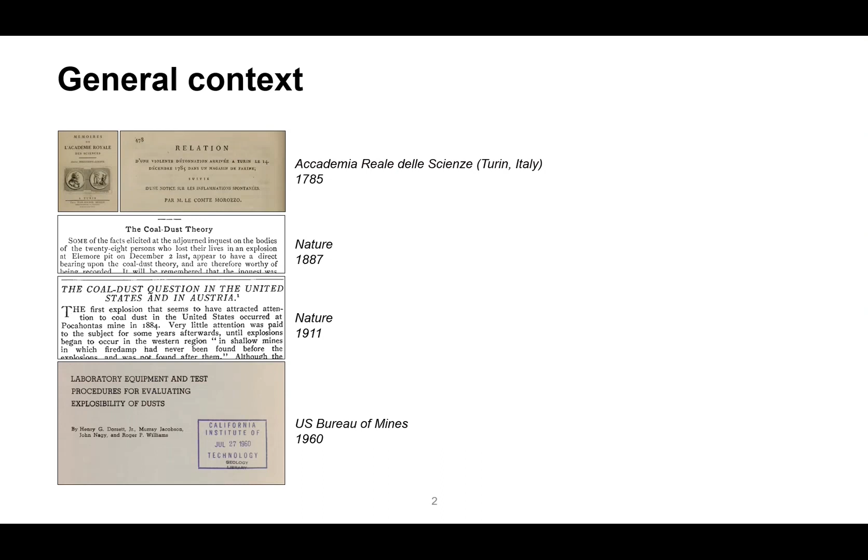Then, with the second industrial revolution and the increasingly important use of coal as an energy source, coal dust explosions in mines caught the attention of the scientific community. In the second half of the 20th century, dust explosions were reproduced on a lab scale to be studied and classified. Nowadays, we associate dust explosions with fast combustion processes involving finely dispersed, finely subdivided material.

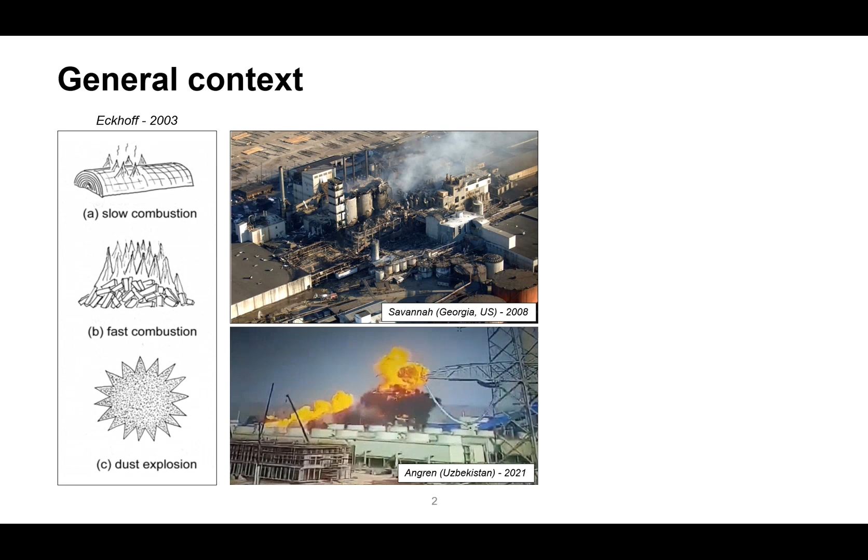We can count on detailed and deep experience feedback, represented also by incident reports. For example, in the Combustible Dust Incident Report, 2020 edition, we find important information to understand these phenomena, such as the type of powder involved in dust explosion incidents. Here you can notice how food products and wood products represent the majority of dust explosion incidents.

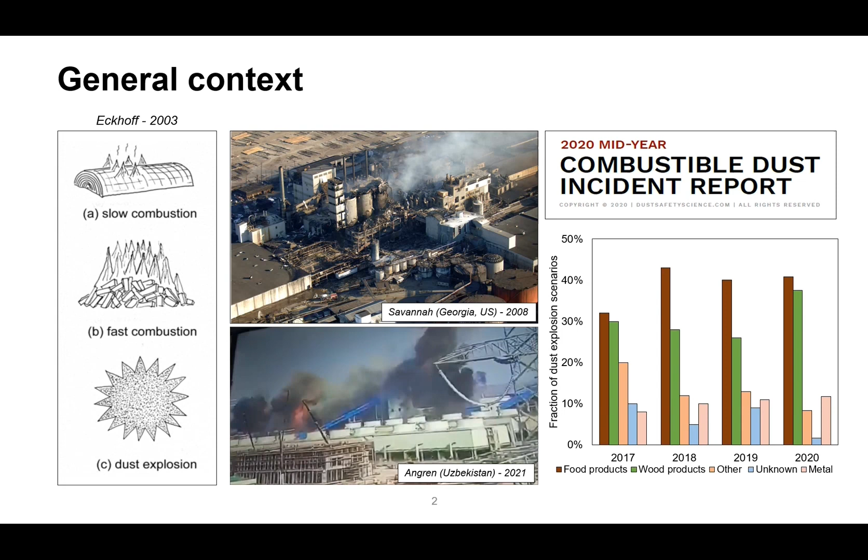So let's start by considering dust deposits - a powder in a quiescent and static state that we disperse in the form of a dust cloud. We can call this process the dispersion step.

Eventually, the dust cloud on its path can encounter an ignition source that can locally increase the temperature of the particles. So we are talking about the particle heating step.

If the increase of temperature is high enough, the pyrolysis reaction may be triggered and pyrolysis products can be generated in the gaseous atmosphere around the particles. Eventually, in the presence of an oxidizer, a flammable atmosphere can be created and oxidation reactions can be triggered.

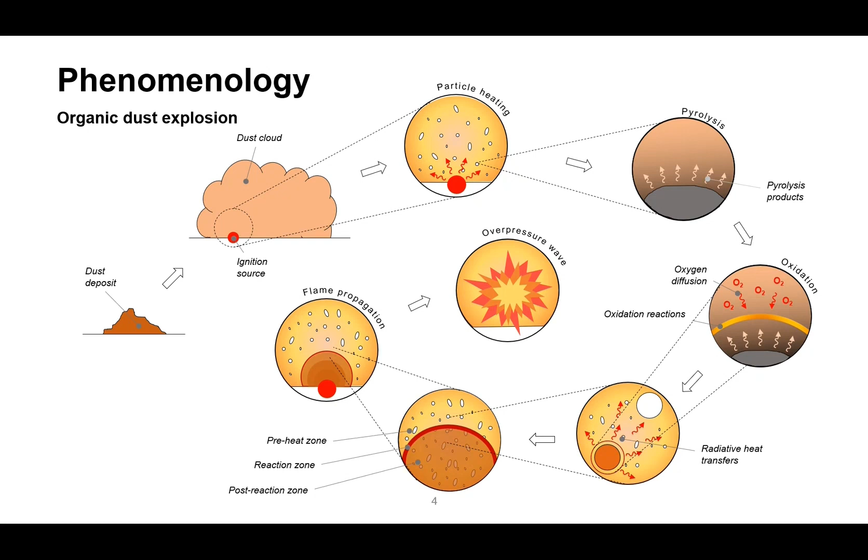This complexity can be resumed in six fundamental steps: the dispersion step, the particle heating step, then pyrolysis and oxidation steps that lead to flame propagation within the dust cloud, and finally the overpressure wave. This is also the global approach of this thesis.

So we took the global phenomenon of an organic dust explosion, we split it into 6 different steps, and we wanted to create and propose experimental tools, eventually supported by modeling, to analyze and characterize qualitatively and quantitatively each step.

The first section of the results will be focused on the dispersion step. The second will focus on particle heating and pyrolysis steps in a dust cloud. The third will analyze the pyrolysis and oxidation reactions and their role in an explosion, considering also the overpressure wave results. Finally, I will present results concerning flame propagation, including some overpressure wave results.

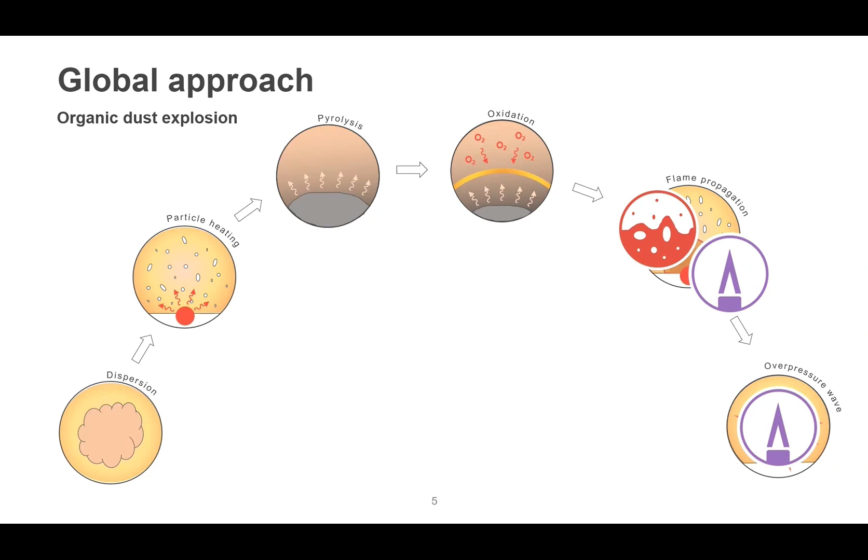So let's start with the outline. I presented the 4 sections, and general conclusions and perspectives for the future will also be presented. Then let's start with the first section, focused on the dispersion step.

First of all, we wanted to develop an experimental strategy for this section. We asked ourselves what we need for, and we found 5 main answers.

First, we needed to control the dispersion conditions in order to study them and their influence on the final results. Then we wanted to use a lab scale setup to develop a non-intrusive approach to study some in situ characteristics of the dust cloud. And then we added also the possibility to set the temperature of the setup.

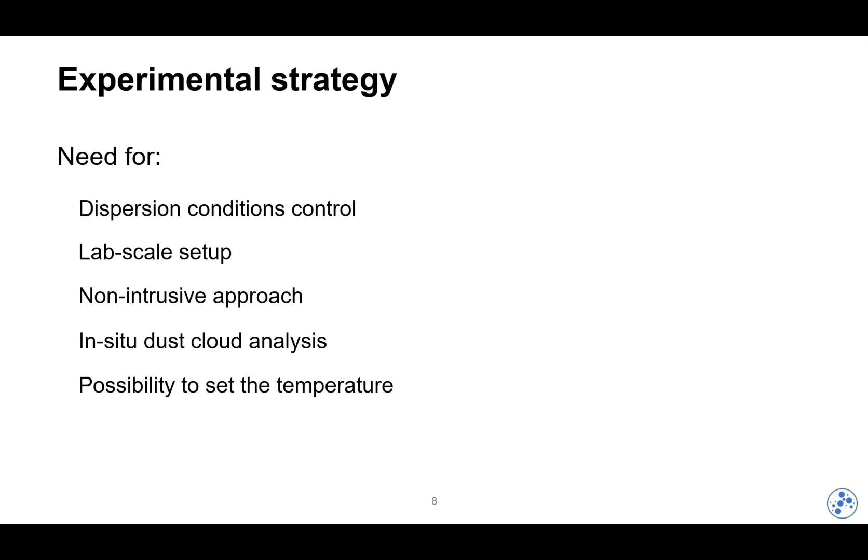The choice fell on the Godbert-Greenwald furnace. It's a standardized apparatus usually used for the determination of the minimum ignition temperature of a dust, and we adapted it to our needs.

The main characteristic that we wanted to study was the dust cloud PSD, so the particle size distribution. We took the Godbert-Greenwald furnace and developed an experimental method to study the time and space evolution of the dust cloud PSD in this apparatus.

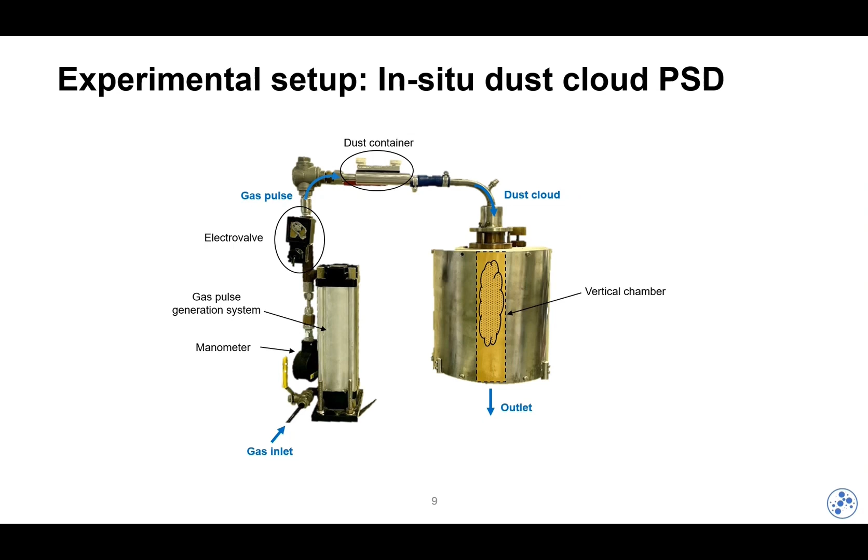It is normally formed by 3 main parts: a gas pulse generation system to the left, the horizontal part at the top is the dust cloud generation system, so the powder is dispersed and passed through the final part, the vertical chamber.

In order to study the space evolution, we selected position 1 to perform the analysis of the PSD, just after dispersion. Position 2, just after the main obstacle on the path of the dust cloud. And position 3, the exit of the vertical chamber.

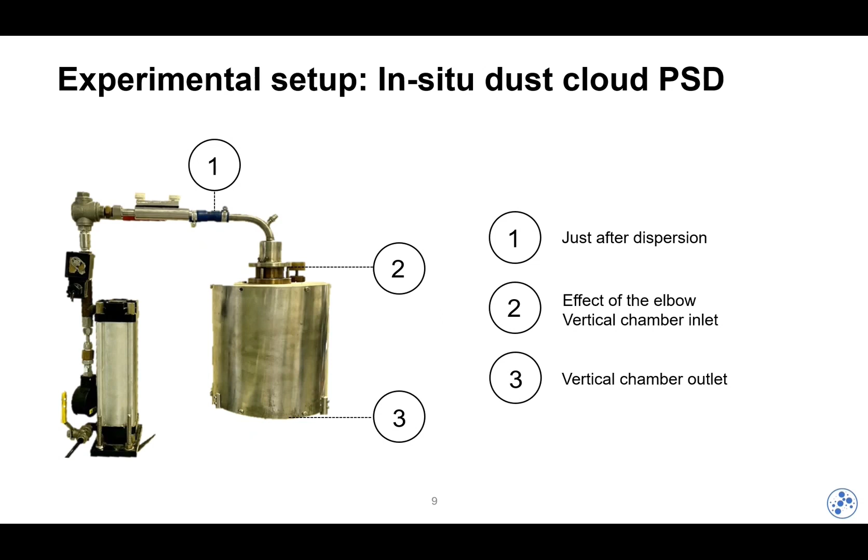Concerning the PSD measurement, we took the Godbert-Greenwald furnace, placed it between the 2 elements of a laser diffraction sensor, and were able to collect PSD curves every 10 milliseconds. So it was a high frequency acquisition analysis, and we used this analytical tool to characterize the dust cloud PSD over time and for the 3 positions.

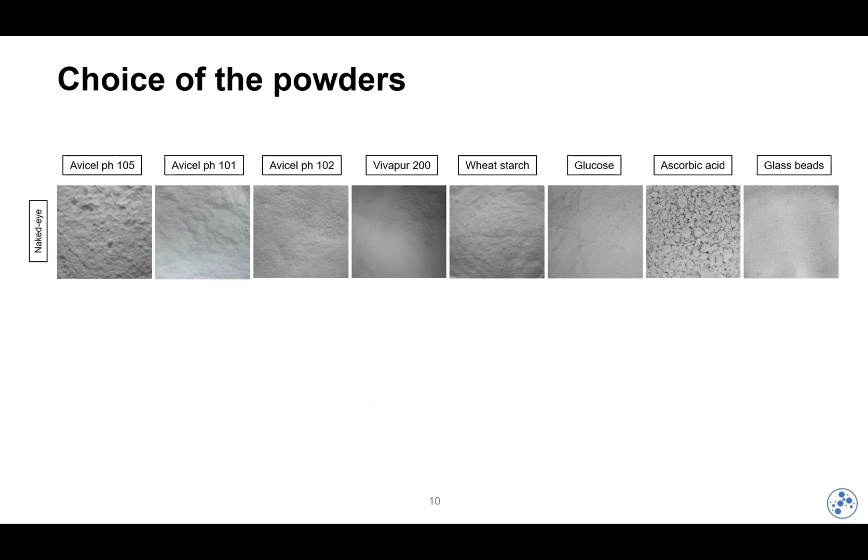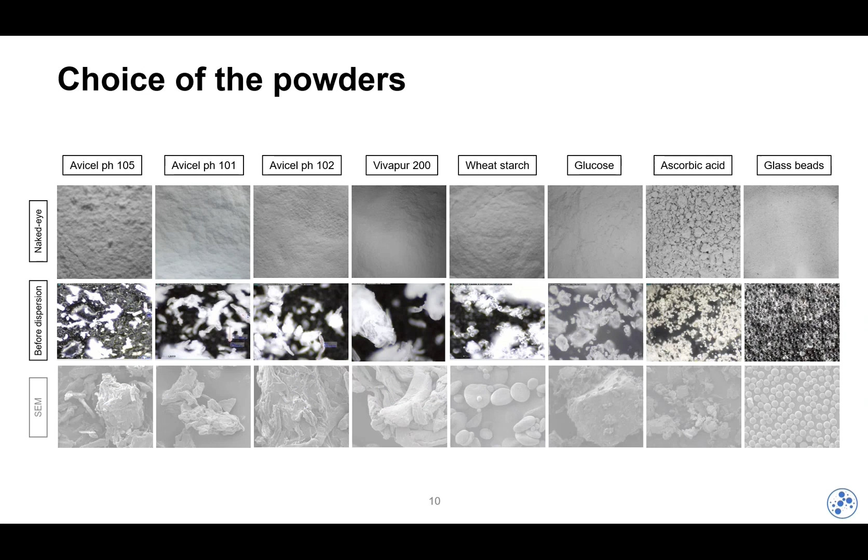Concerning the choice of the powder, the organic dust that we selected, we chose 7 powders plus a reference powder. We characterized them in terms of naked eye appearance, optical microscope imaging to characterize the particle shape, and with the scanning electron microscope, we characterized both the shape of the particles and the morphology of the surface.

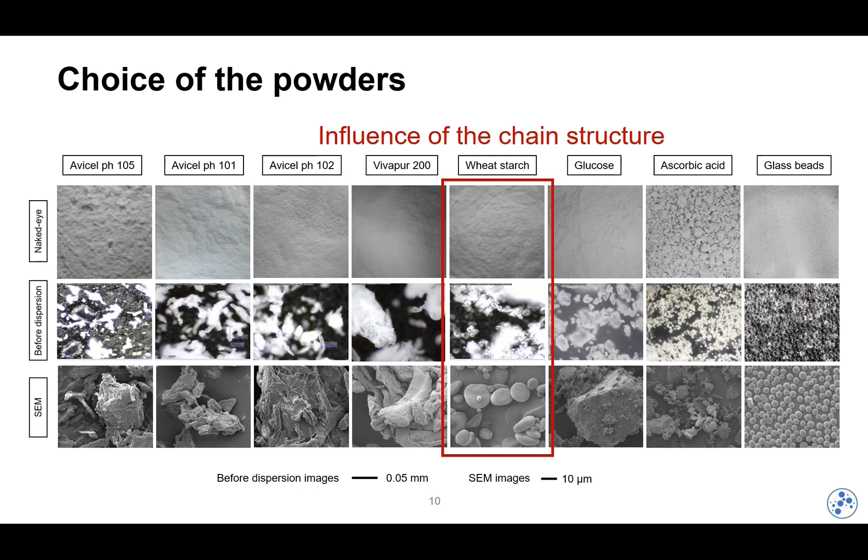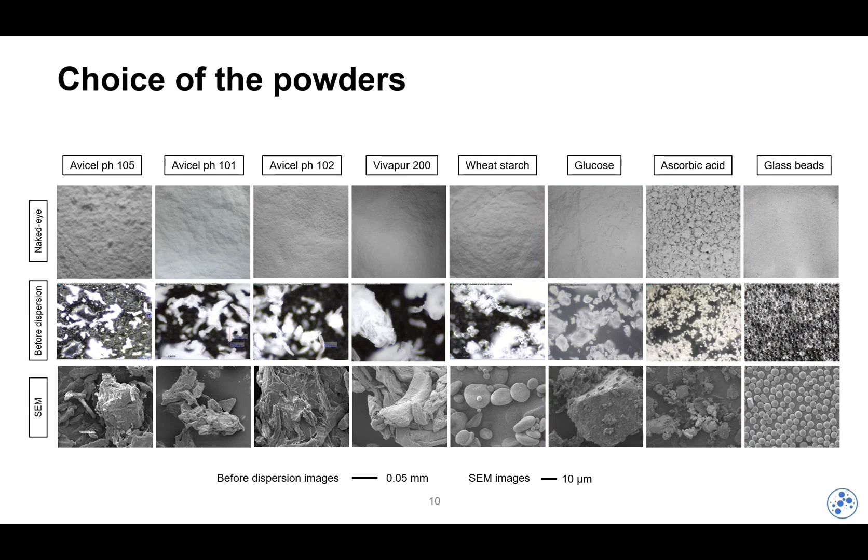We chose 4 different celluloses to study the influence of the initial PSD on the dispersion step. Then starch, to study a molecule that has the same main monomer as cellulose but a different chain structure, so different properties of the material. We selected glucose and ascorbic acid to introduce a completely different chemical nature among the powders, and glass beads as a reference sample.

The second layer of information is represented by the agglomeration index. We wanted to quantify the agglomeration tendency of each powder. We plot the D90, a characteristic diameter, as a function of time.

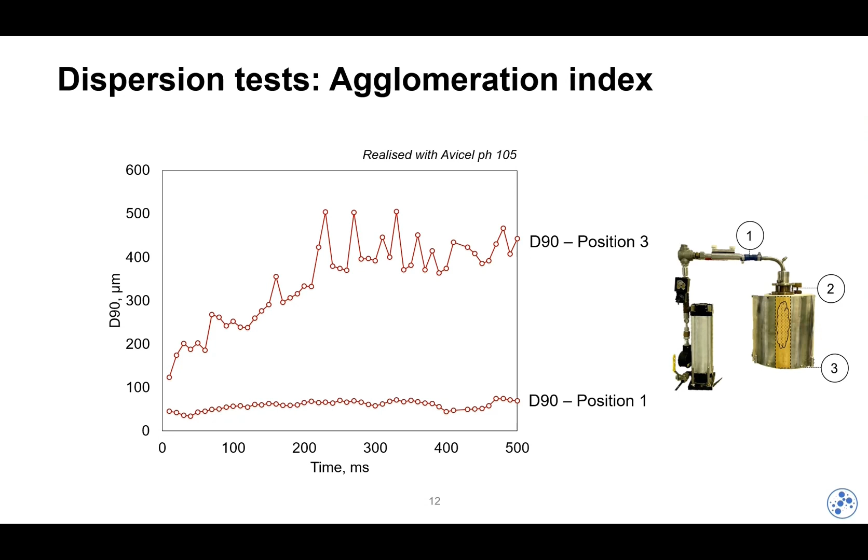As you can see, for example, if we consider position 1 and position 3, we can notice a high agglomeration tendency, which we wanted to characterize, to quantify. So we calculated the normalized difference between position 3 and position 1, and we calculated the agglomeration index, for example, associated to D90.

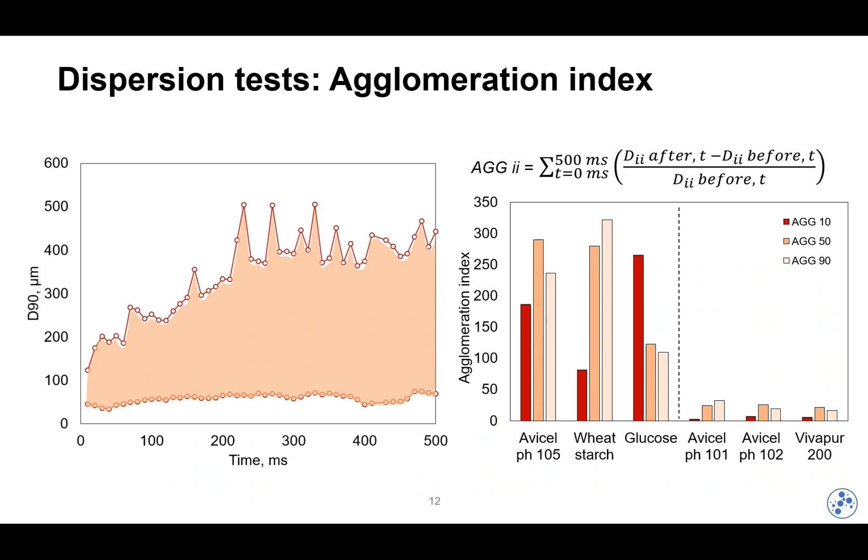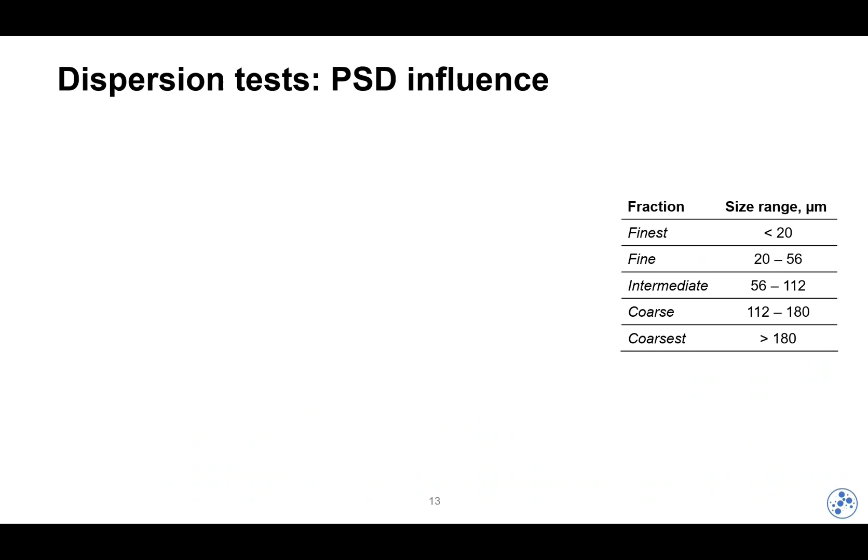We can introduce also the characteristic, the influence of the chemical nature of the 2 samples in the agglomeration tendency.

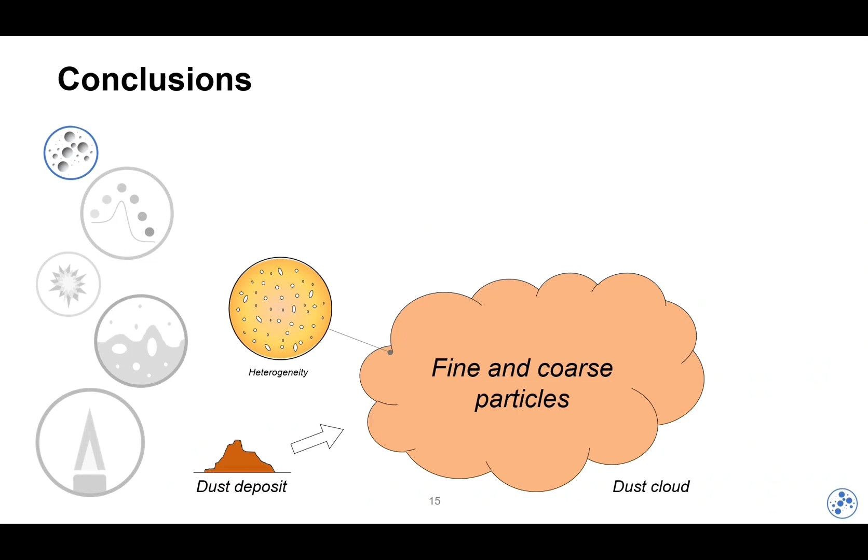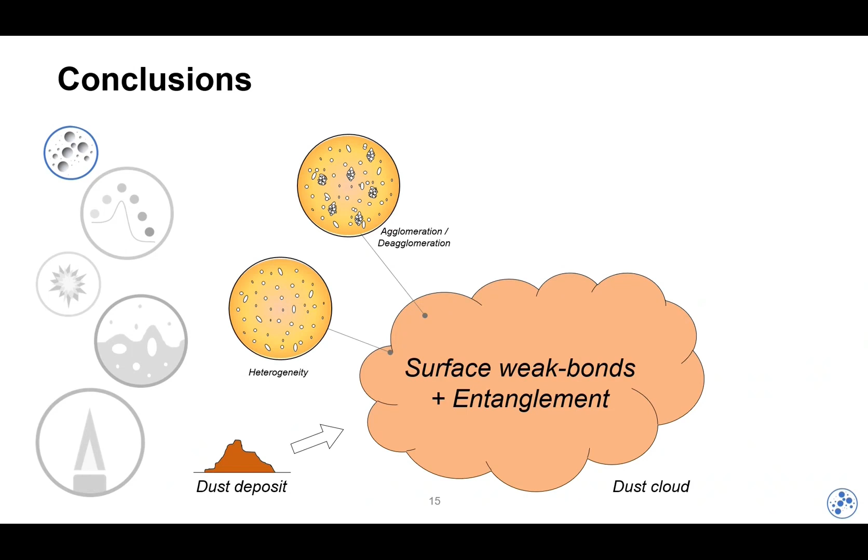In order to conclude this first part, if we consider a dispersion step, we always have to take into account the heterogeneity associated to a dust cloud. There are finer and coarser particles that lead to different agglomeration phenomena. The finest fraction is more prone to surface weak bonds interaction. The coarser particles are more prone to entanglement, so geometrically interaction between the particles.

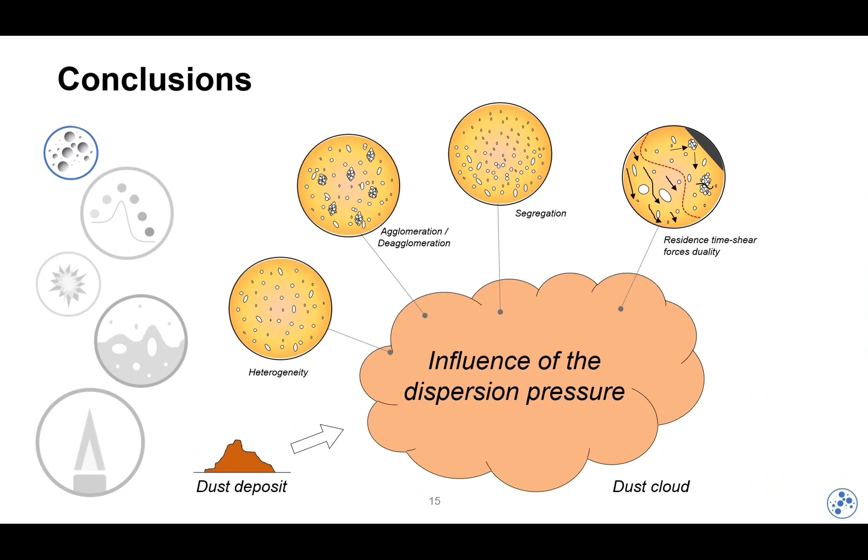A high level of segregation modifies the residence time distribution of the dust cloud. There's a duality between the residence time and the shear stresses, which is influenced by the dispersion pressure. And then a final important influence on the ignition phenomena at higher temperature.

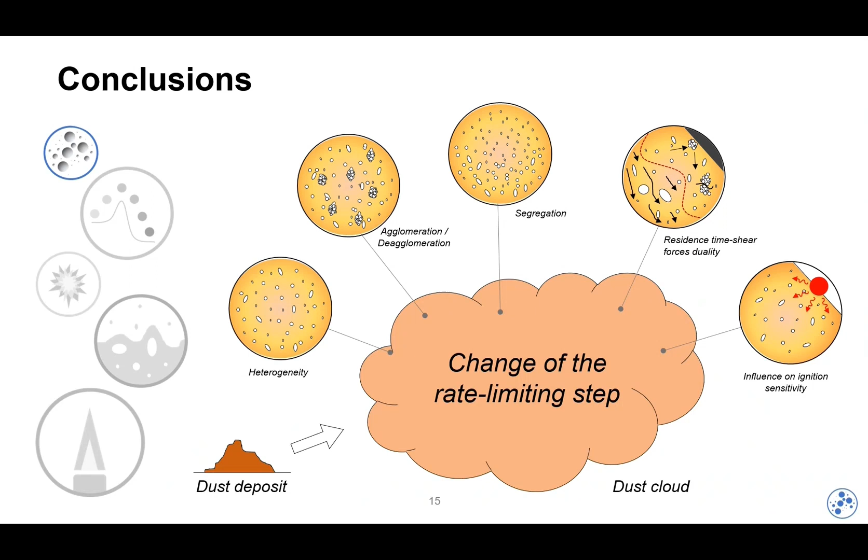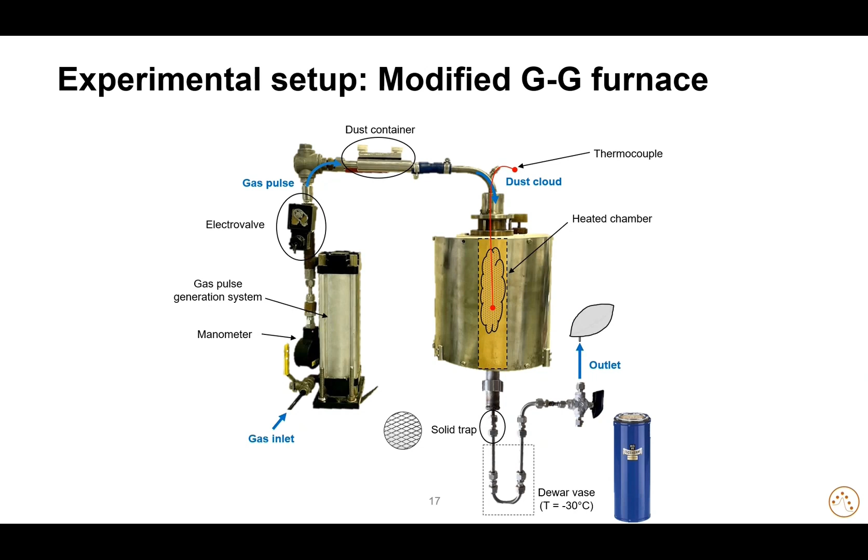This leads us to the second section, more focused on the behavior of dust cloud in terms of particle heating and pyrolysis. We consider the same experimental setup, but we slightly modified it. We added a final section in order to be able to create an inert atmosphere inside the setup, and at the same time, we wanted to be able to collect solid products, the condensable fraction, and the gaseous products coming from the flash pyrolysis in the dust cloud.

The experimental procedure consisted in dispersing 0.2 grams of cellulose here, but we performed other tests on other powders in the furnace at different temperatures, and characterization of the different fractions of pyrolysis and combustion tests with different analytical techniques.

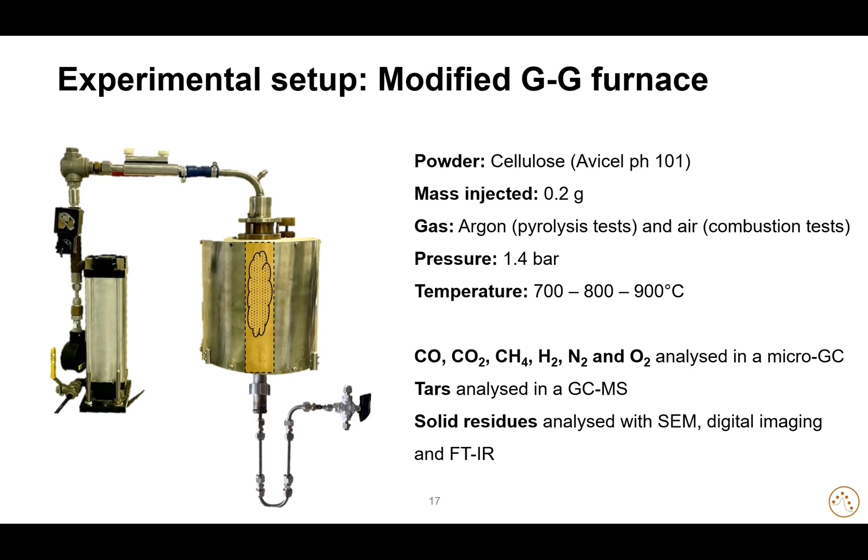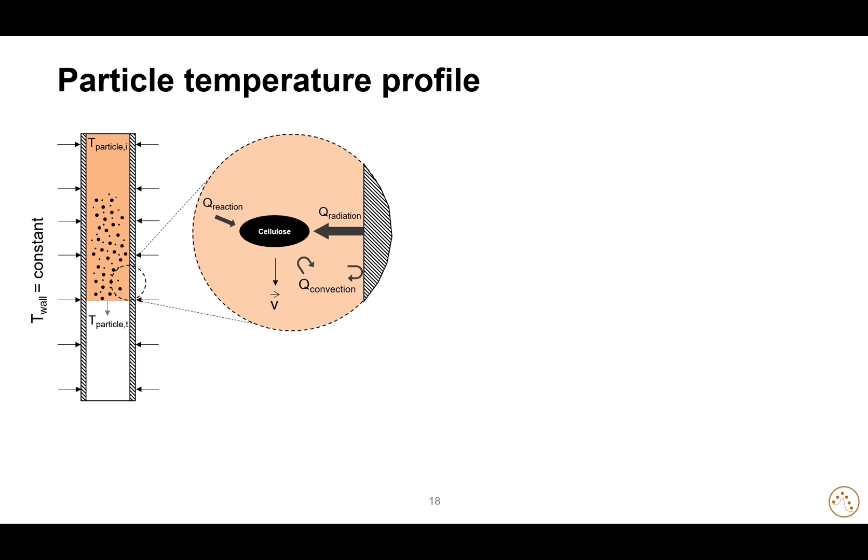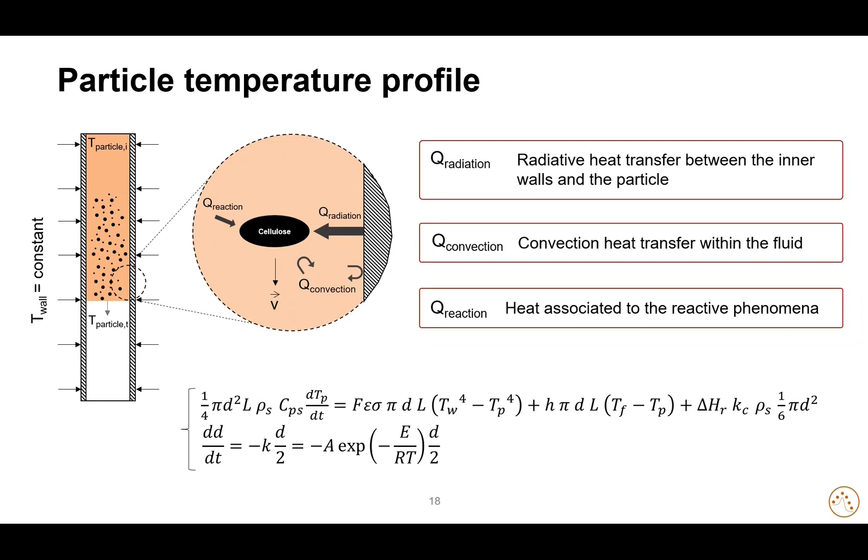In order to create the first layer of information, we wanted to add some information about the particle temperature profile. We considered the dust cloud passing through the cylindrical chamber, and we considered the three main heat transfer modes to non-spherical particle of cellulose: radiation, convection in the gaseous phase, and the heat associated to the different reactions. We elaborated the model, considering the particle temperature and the particle thickness as the two variables, and we were able to combine these results with experimental data to elaborate what we call the dust cloud thermal analysis.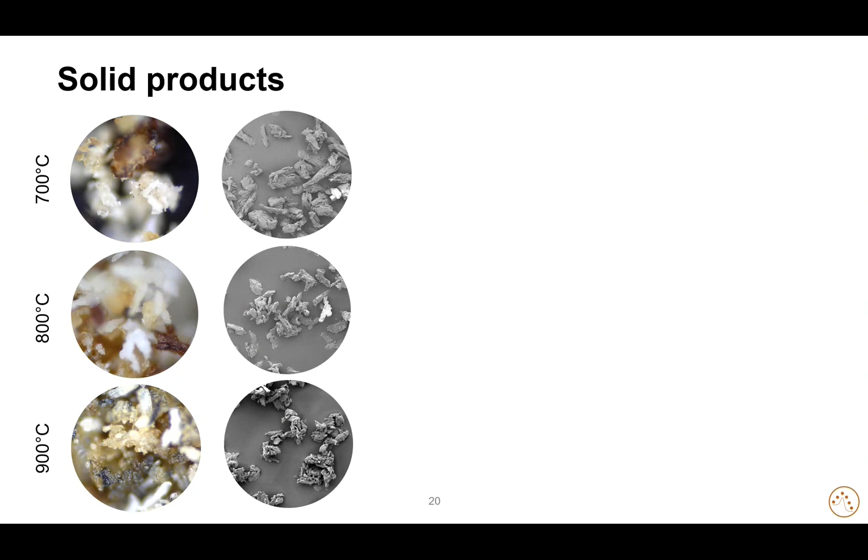This was confirmed by the analysis of the solid products. The images obtained with the optical microscope allowed us to stress out the heterogeneity of the conversion degree. Here you can see an increasingly converted residue as the temperature increases. The scanning electronic microscope allowed us to confirm these results, especially in terms of surface morphology. We can notice an increasingly important volatilization and agglomeration of the particles.

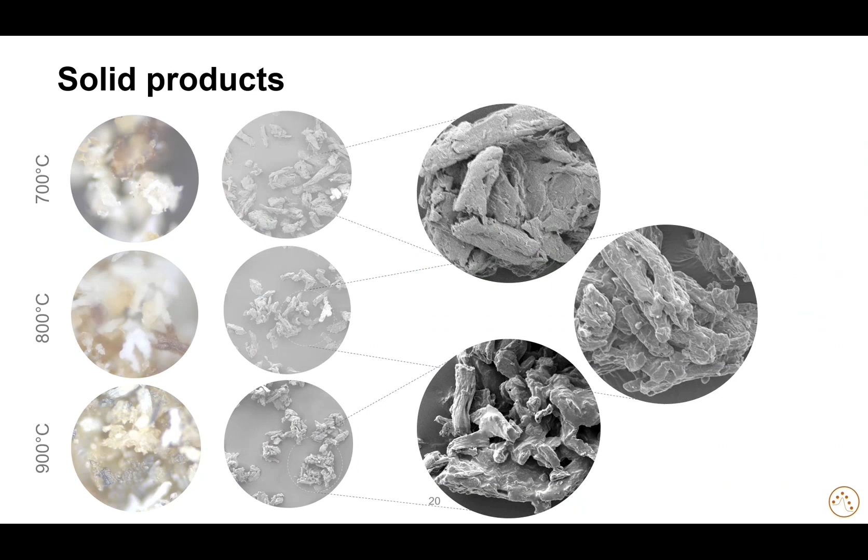And to support these results, we performed infrared absorbance analysis.

As for the condensable products, we were able to isolate one key molecule, the levoglucosan, representing the main product of the flash primary pyrolysis. It is also related to cracking reactions and oxidation reactions.

With the GC-MS, we were able to stress an increasing production of levoglucosan as the temperature of the reactor goes from 700 to 800 Celsius, and a subsequent cracking of levoglucosan as the temperature increases to 900. With the combustion tests, we were able to stress the consumption of this molecule in the oxidation reactions.

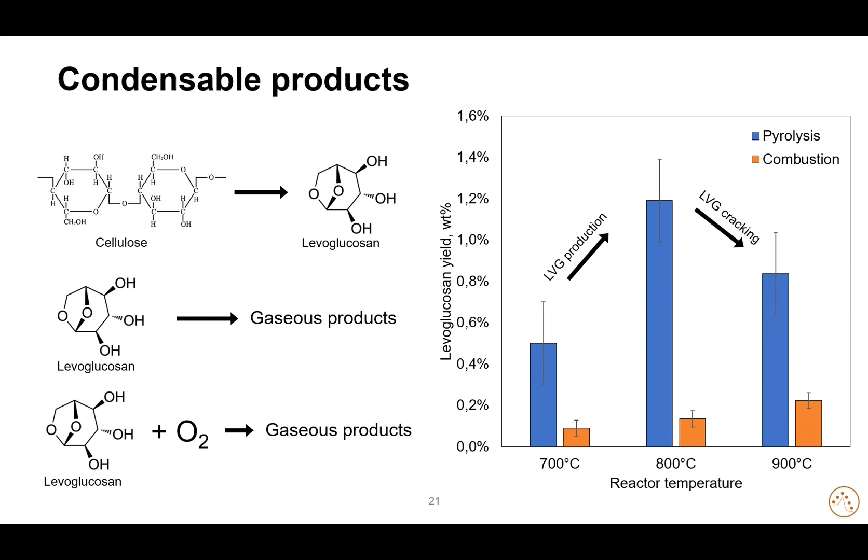Finally, as for the gaseous products, we isolated H2, hydrogen, methane, CO, and CO2 as the most abundant products. We can notice a high influence of the temperature of the reactor for the methane. If we compare these results with the combustion tests, we can notice a very slight influence of the reactor temperature for hydrogen.

Methane is importantly converted in the oxidation reactions. CO, which can be associated to a semi-complete reaction of oxidation, is way higher, way more abundant in the combustion tests. CO2 is slightly higher in the combustion test, but still comparable to the pyrolysis ones.

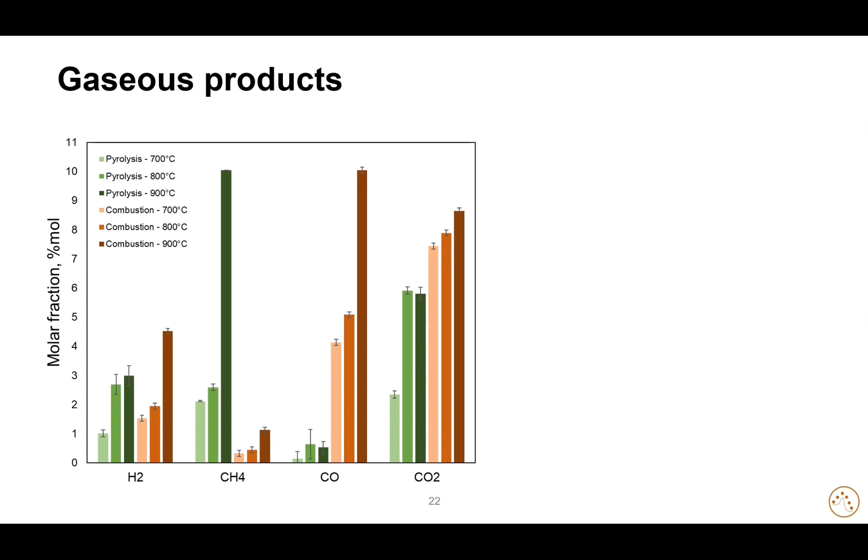All these results were introduced in a MATLAB fitting code in order to elaborate a fast mechanism of pyrolysis, conceived with operating conditions characteristic of dust explosions.

So we were able to elaborate a mechanism consisting of 5 reactions. The first one is the activation of the cellulose, which leads to the production of tar, here represented by the levoglucosan, which in turn converts into gaseous products. The third one is the direct conversion of the cellulose into gaseous products. And the last one is the conversion of cellulose into char and water.

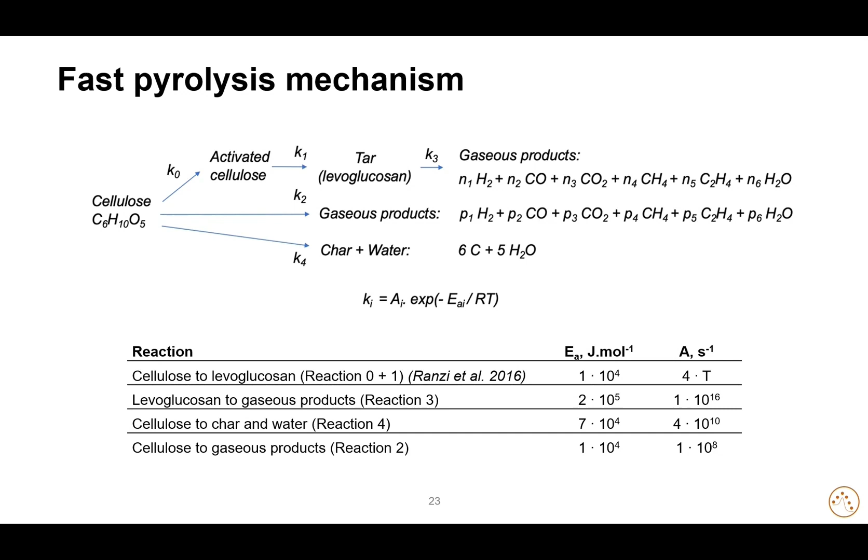We were able to determine the activation energy and the pre-exponential factor for reactions 3, 2, and 4, and we were able to characterize the fast cellulose pyrolysis reactions in the conditions of a dust explosion.

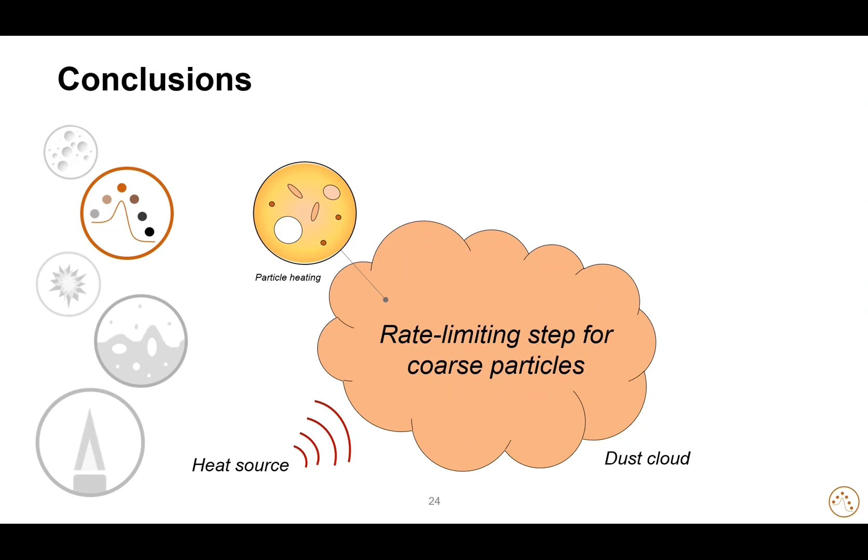This leads to some important conclusions. If a dust cloud is subjected to a heat source, we can always identify a particle heating step, which can be the rate limiting step if the particle size is high enough. Then primary pyrolysis, represented by the volatilization of the finer particles and, at the same time, the depolymerization of the solid phase of the cellulose.

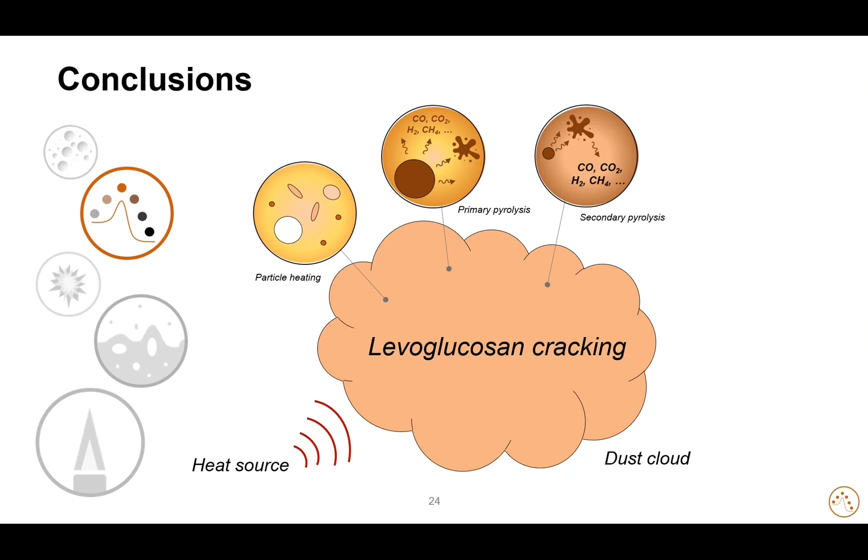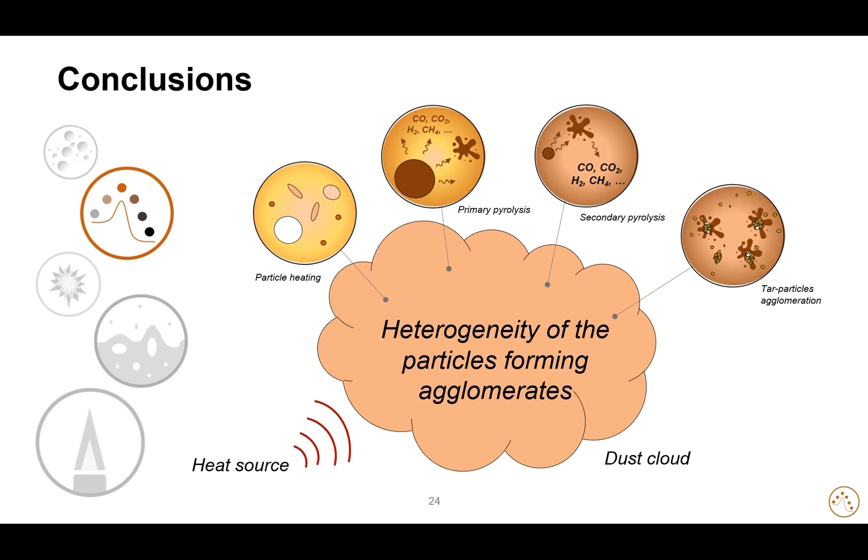Then secondary pyrolysis reactions, represented mainly by the cracking of levoglucosan. And then the heterogeneity characteristic of a dust cloud leads to some agglomeration involving also tar molecules. Finally, the oxidation reactions involve levoglucosan consumption and incomplete combustion, verified with the gaseous products analysis.

The third section is represented by the study of the role of pyrolysis and oxidation reactions, considering them as part of an organic dust explosion phenomenon.

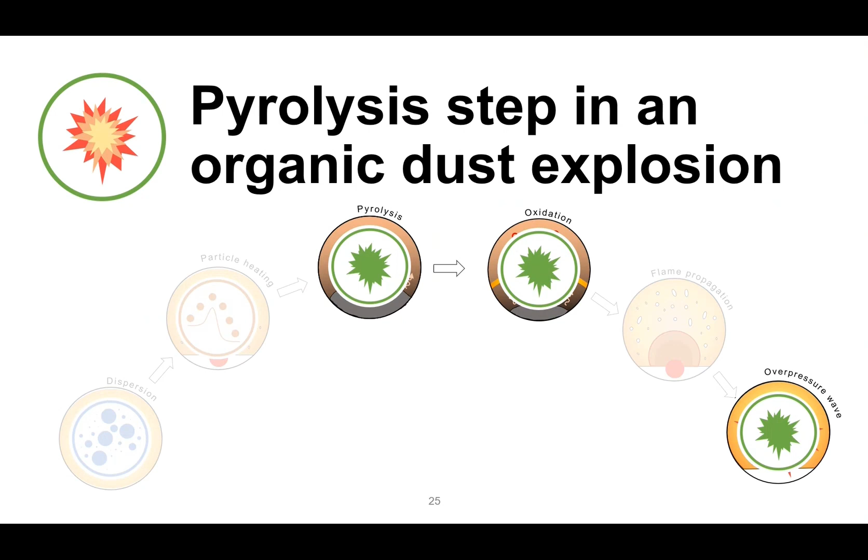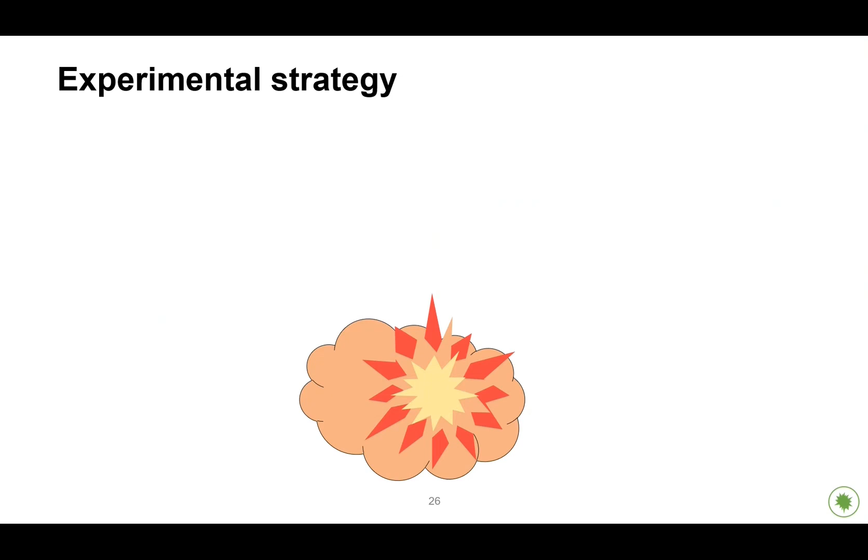The experimental strategy was elaborated considering the different phases involved in a dust explosion phenomenon. So we can always encounter unreacted particles, a vapor phase represented by water or tar molecules, pyrolyzed particles, a gaseous phase, and ashes. So we wanted to represent each phase with a different compound.

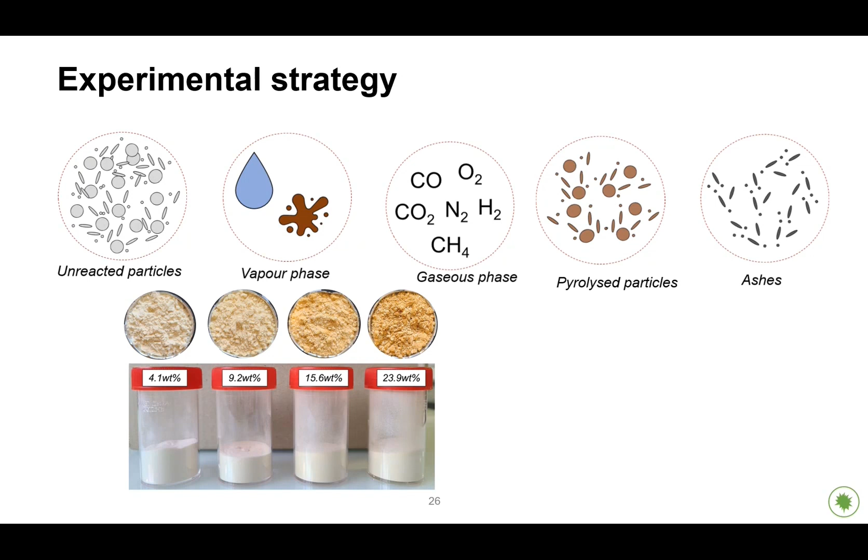We selected, for example, pure cellulose to represent the unreacted particles. We selected different tar-coated celluloses to represent the vapor phase. So we took pure cellulose and introduced some tar from flash pyrolysis of cellulose. We mixed it up, and we obtained 4 different powders associated to 4 different concentrations of tars.

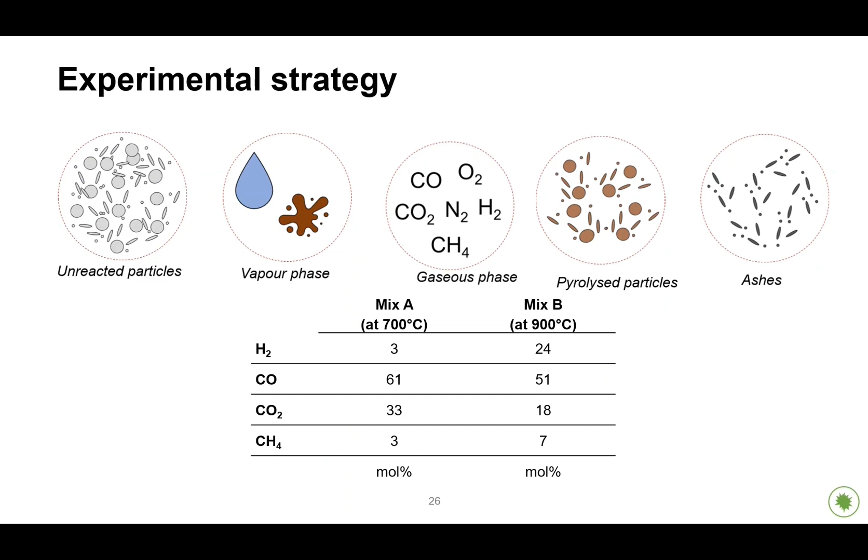As for the gaseous phase, we considered the results from the previous study in section 2, and we elaborated 2 gaseous mixtures, mix A and mix B, to evaluate the influence of the reactor temperature with the explosion tests. In the explosion tests, the pyrolyzed particles and the ashes were merged together and represented by biomass char.

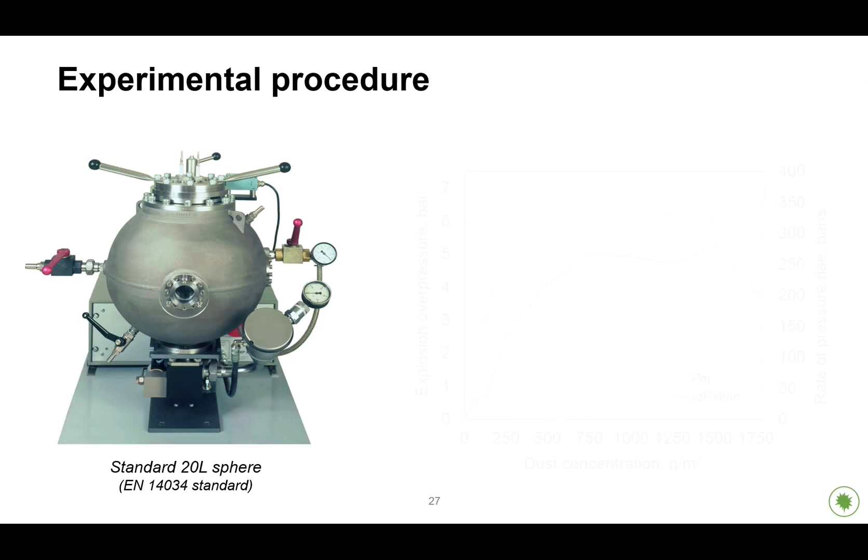The experimental procedure consisted in using the 20-liter sphere, a standardized vessel used to determine the explosion severity parameters of a dust explosion. We can obtain a curve like this, plotting as a function of dust concentration the explosion overpressure and the rate of pressure rise, in order to identify Pmax, the maximum pressure attained over a series of tests, and dPdt max, the maximum rate of pressure rise obtained over the series of tests. We performed these tests with pure cellulose and the 2 pure gaseous mixtures.

We obtained, as for considering the rate of pressure rise, some very different results.

For example, for cellulose, we can attain approximately 250 bars per second, while for mix A and mix B, we respectively attain almost 1,000 and almost 2,000 bars per second. This is due to the different composition of the 3 compounds, especially considering mix A and mix B, and the hydrogen fraction of the 2 gaseous mixtures. Then we perform some hybrid mixture tests.

A hybrid mixture is a mixture composed of at least 2 different fuel combustible phases, here represented by pure cellulose and one of the 2 gaseous mixtures. We firstly approached these tests by keeping the initial mass of the system constant.

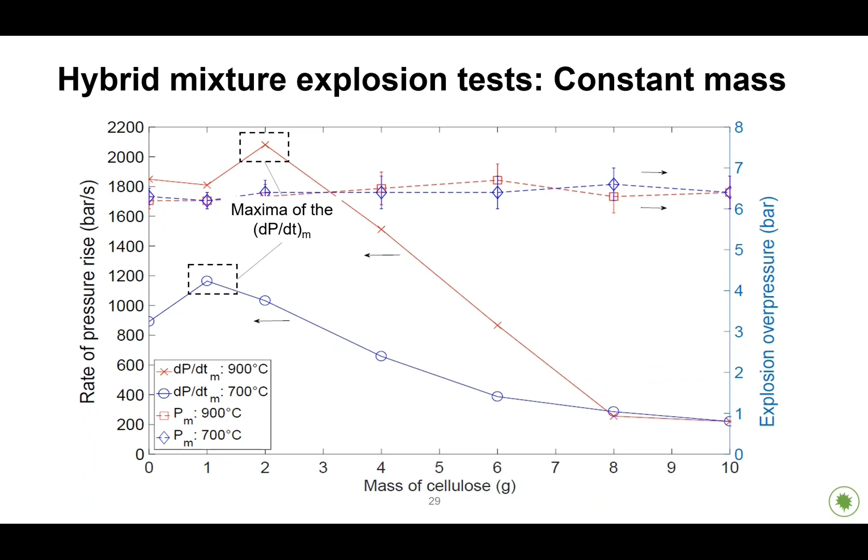We can, on the other hand, notice a minimum point of the dP/dTmax corresponding to high concentration of cellulose mass, an increasingly accelerated kinetic as we substitute the powder with gas mixture, and 2 different maxima corresponding to small amounts of powder. We can conclude that by introducing small amounts of powder into a gaseous explosion, we can slightly increase the dP/dTmax, which can be related to the increased, enhanced relative heat transfer between the reaction zone and the preheating zone.

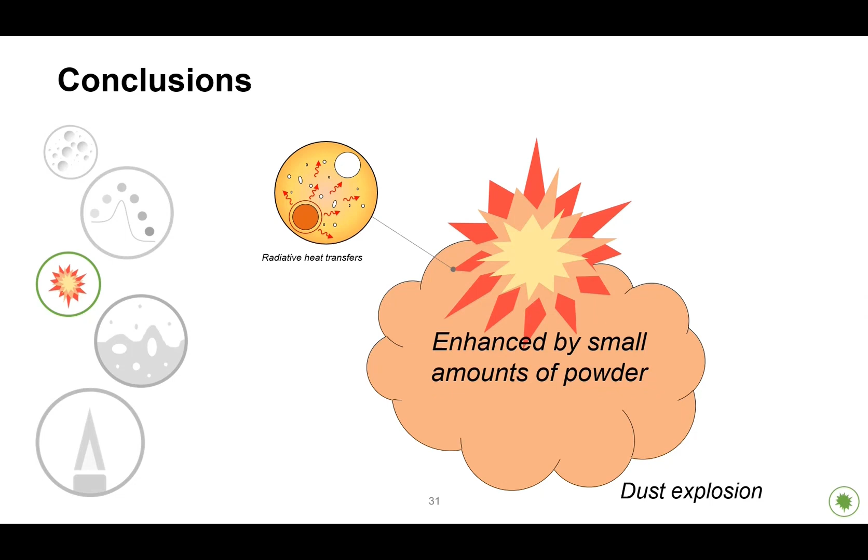It is always very important, mandatory even, to consider the role of radiative heat transfer in the global phenomenon. The flame propagation can be increased by adding a small amount of powder into the exploding phase, the exploding system. And each organic dust explosion can be associated with a certain hybrid mixture system.

The last part consisted in studying the flame propagation step. So we introduced also some results relative to the explosion pressure. The approach was simple: we wanted to compare different results from different experimental setups.

The first two setups are represented by open 20-liter spheres. So it's the standard 20-liter sphere equipped with a relief valve and a visualization window that allows us to follow the propagation of the flame kernel in the dust cloud, within the dust cloud.

The second setup consists of a vertical flame propagation tube equipped with a dispersion system, 2 electrodes that ensure the presence of an ignition source, here represented by an electrical spark, and a relief valve for the exit of the combustion products. This can be associated with high-speed videos, so we can exploit the high-speed videos of these two setups in order to evaluate the flame propagation within the dust cloud.

These two setups allowed us to access some global information about the propagation step within the dust cloud. We then wanted to add more information, so we elaborated a micro-fluidised bed burner, which consisted of three main parts: a micro-fluidised bed, a fluidized sand bed, a feeding system at the top in the image, and a nozzle burner.

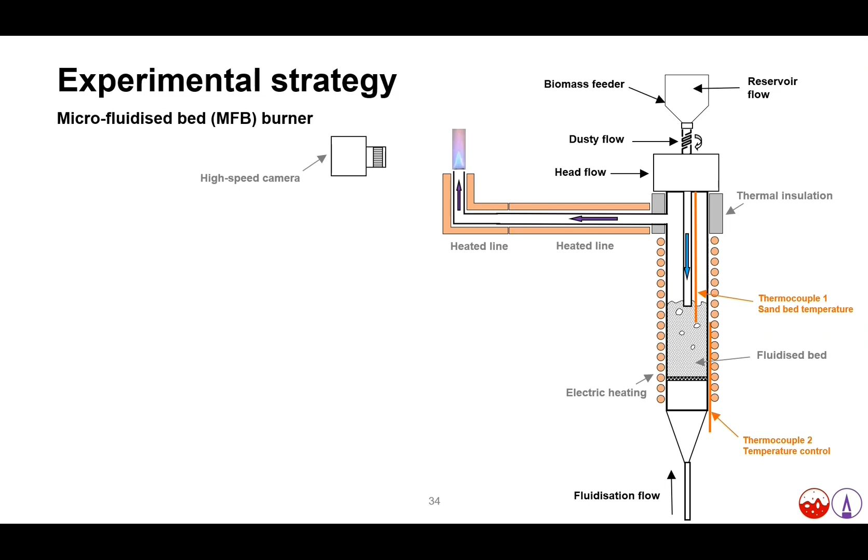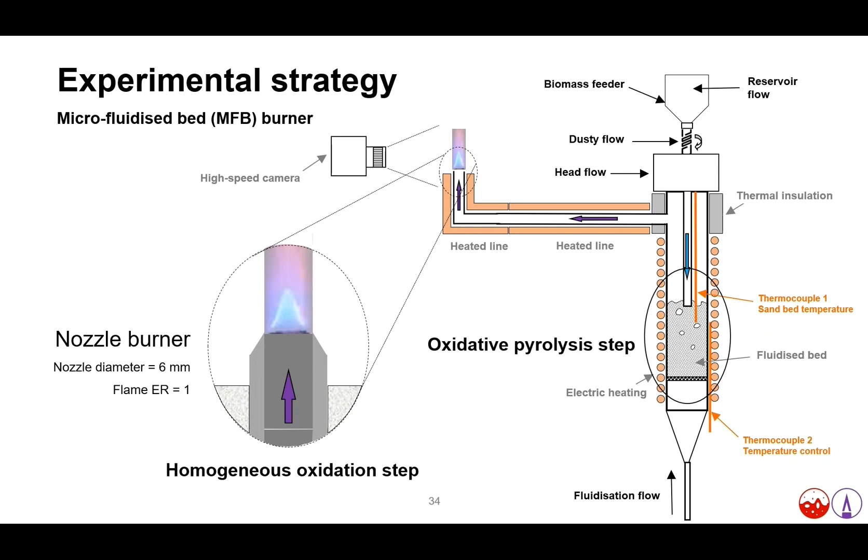By placing a high-speed camera in front of the nozzle burner, we were able to record high-speed videos of the flame and then evaluate the flame speed of the gaseous products. The concept behind this approach was to separate the pyrolysis step, the oxidative pyrolysis step occurring in the sand bed, from the oxidation, which occurs in the homogeneous phase in the flame.

First of all, we needed to characterize the micro-fluidised bed. We placed the same high-speed camera in front of the setup. We were able to visualize the fluidized sand bed through a visualization window in the reactor, and we were able to record this kind of video.

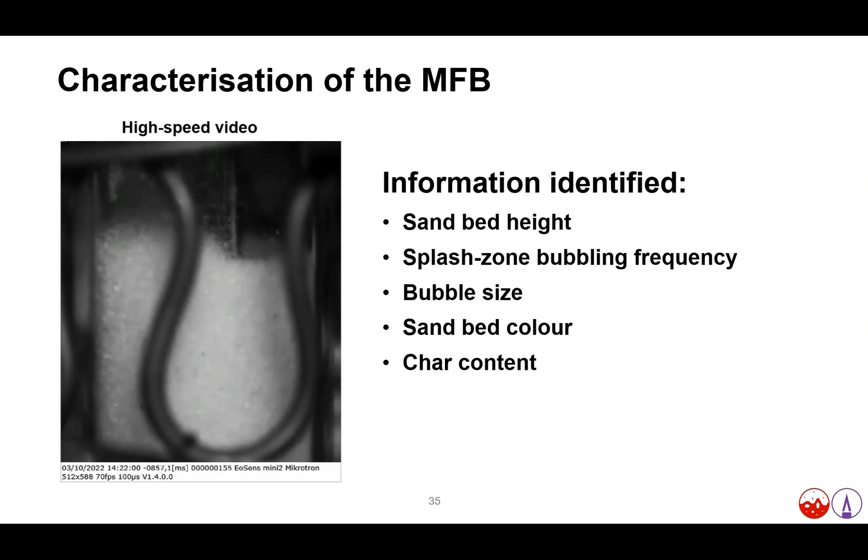The videos of the fluidization contain a lot of information. We selected some important ones: the principal parameters are represented by the sand bed height and the frequency of bubbling of the splash zone, then the bubble size, the sand bed color, and the char content that can be associated with a certain color of the sand bed, the fluidization movement of the sand bed, and finally the gas preferential path.

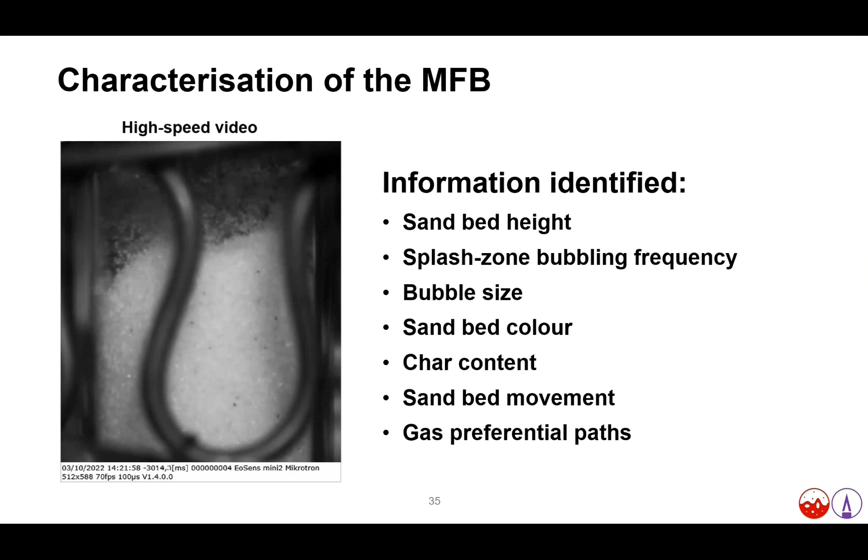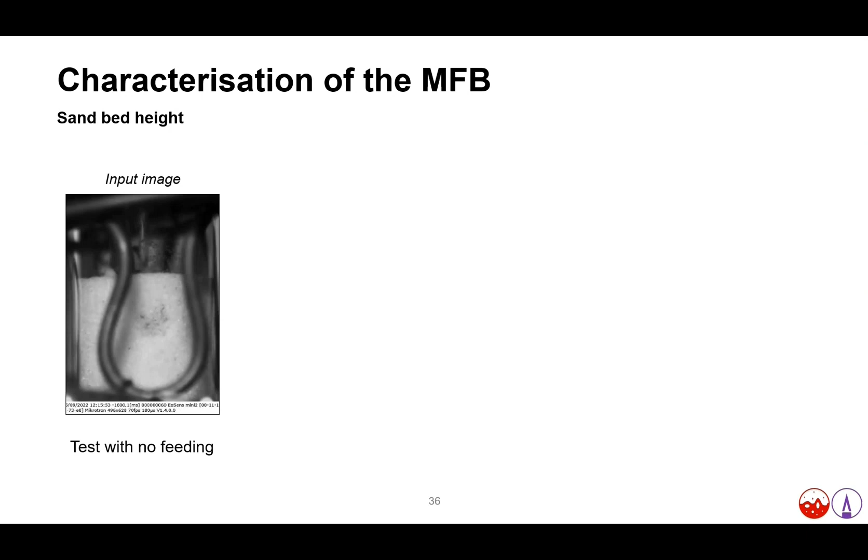We selected the first two, and I will present the results concerning the sand bed height. The videos were decoupled into 100 frames, which constituted the input image in a MATLAB code.

We were able to calculate the relative bed height of the micro-fluidised bed as a function of the ratio U to UMF, the minimal fluidization velocity. We characterized the expansion of the bed due to an increasingly high U to UMF ratio, and the effect of temperature.

This allowed us to select the optimal operating conditions in order to produce a stable flow of pyrolysis products with stable fluidization. By changing the different parameters, we were able to select the operating conditions to obtain a stable fluidization.

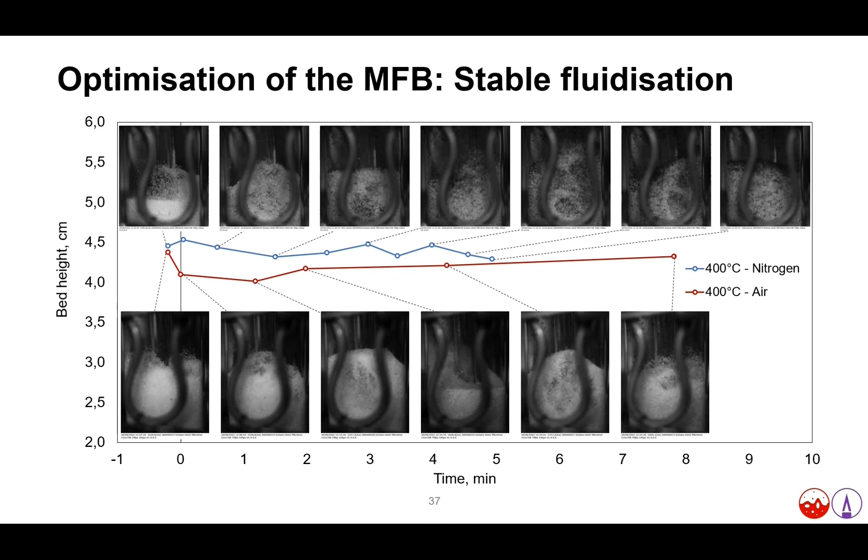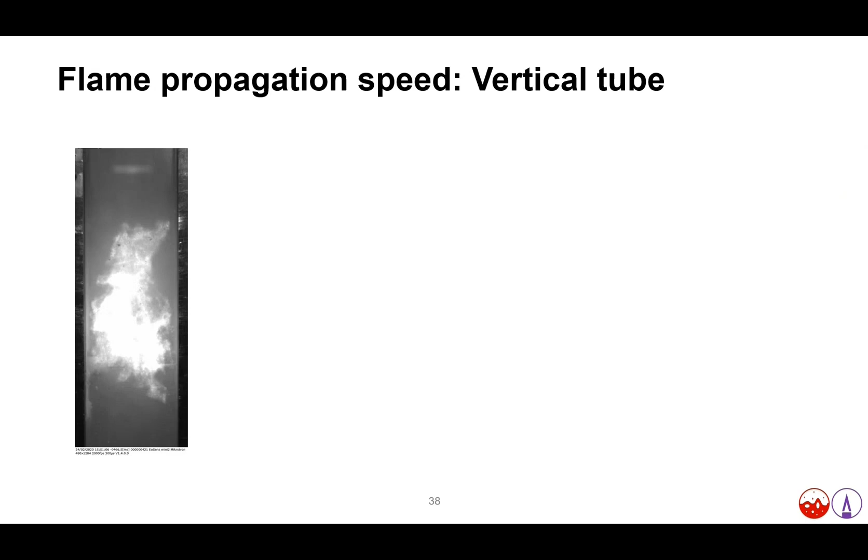In terms of flame propagation speed, we started with the vertical tube. We were able to follow the propagation of the flame kernel, then for each frame we extrapolated the contour of the flame.

So, 22 centimeters per second represents the unstretched flame speed, the speed of the flame propagating in the dust cloud.

Second, results concerning the 20-liter sphere: we wanted to introduce a different approach from the experimental one. We considered a semi-empirical relationship that allows us to connect the explosion overpressure results, the explosion severity results, to the dust concentration.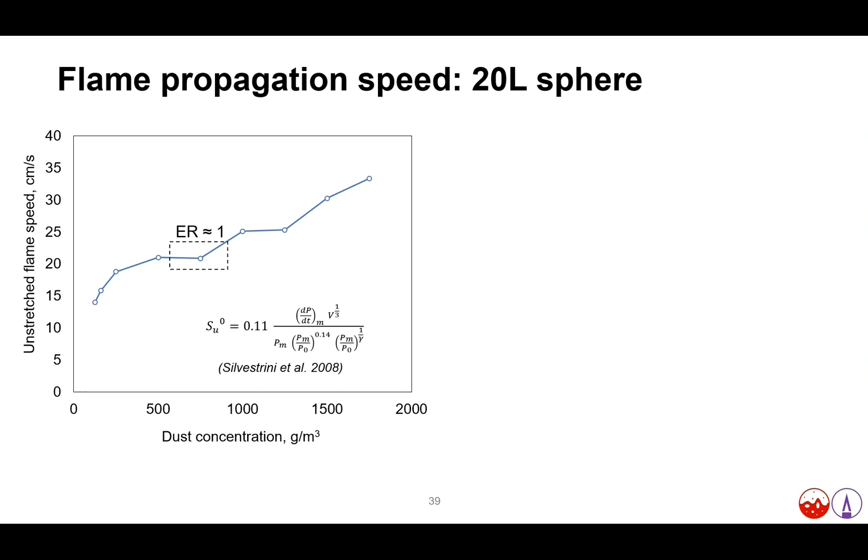Using this Silvestrini relationship, we calculated the unstretched flame speed as a function of dust concentration, and by isolating the range associated with an equivalence ratio of 1, we determined a range of unstretched flame speed between 20 and 23 centimeters per second.

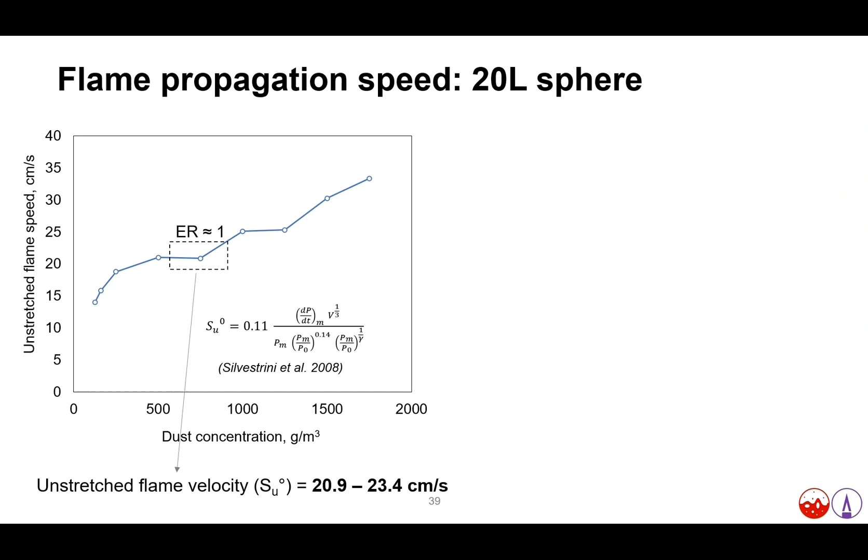This was compared to a more experimental approach. With the open 20-liter sphere, the approach is the same as with the vertical flame propagation tube, and the unstretched flame speed determined here was 26.6 centimeters per second.

These results come from Santander et al., who worked with nanocellulose. The slight discrepancy between the two values presented so far can be due to a different particle size of the dust cloud.

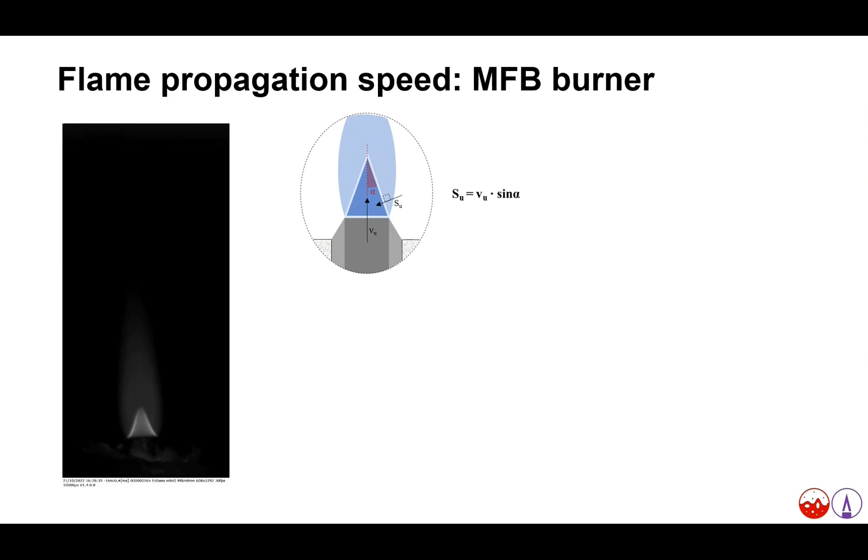Finally, the microfluidized bed burner: we were able to stabilize a flame and calculate the alpha angle and the gaseous flow needed to determine the laminar flame speed of the hot gases.

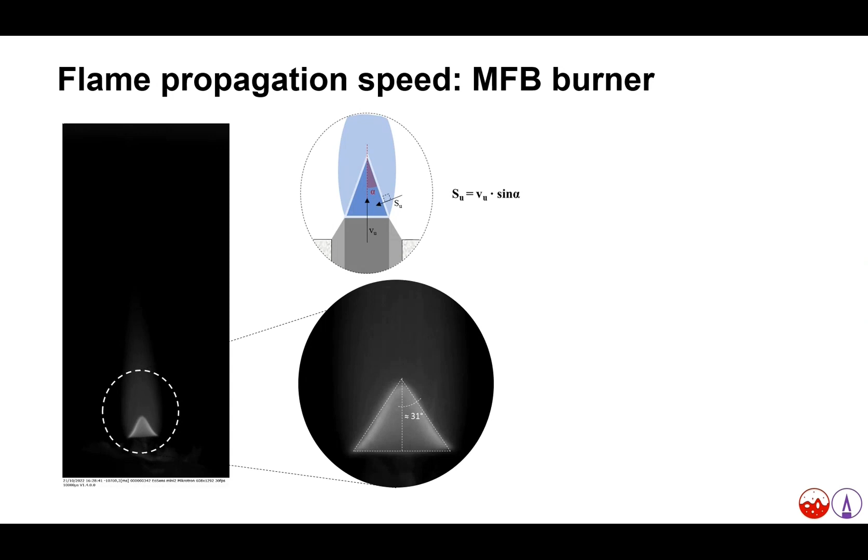We consider the little cone flame and calculated an alpha angle for each frame, which leads to a laminar flame speed as a function of time.

By considering the region where we were able to stabilize the flame, we determined a laminar flame velocity of approximately 140 centimeters per second relative to the hot gases.

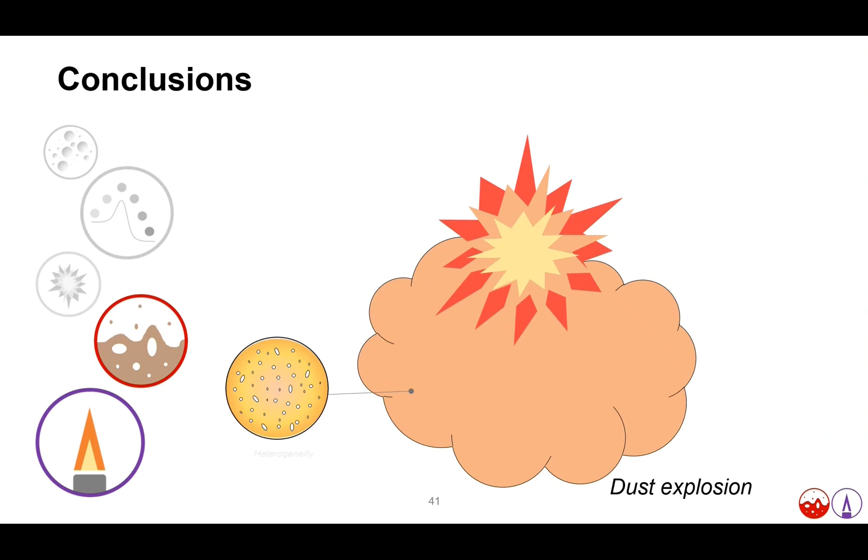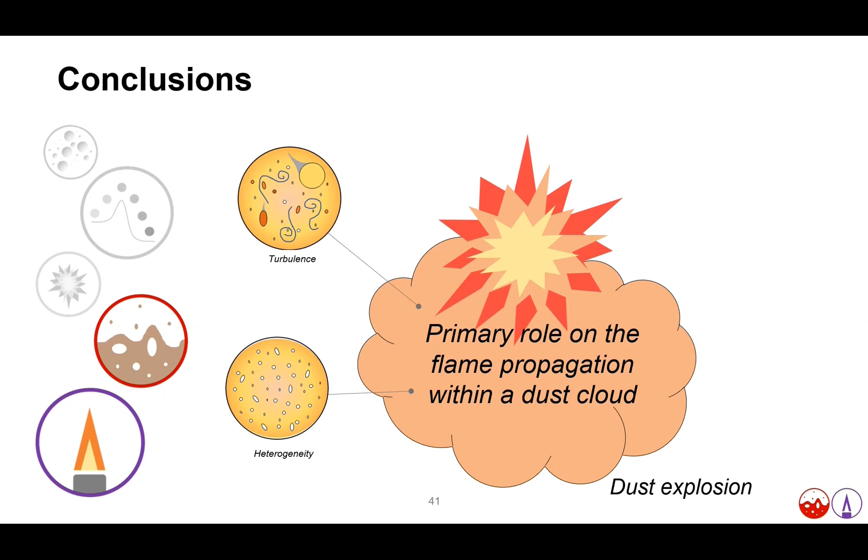This leads us to important conclusions concerning the flame propagation step. First, heterogeneity and turbulence are characteristics of the dust cloud. We were able to carve out the turbulence and heterogeneity characteristic of a dust cloud by introducing the experimental approach of the microfluidized bed.

The flame propagation and flame speed in general allowed us to compare different phenomena, and we were able to validate the feasibility of this experimental approach for determining the flame speed.

General conclusions and perspectives for the future: we were able to characterize the dust cloud in terms of PSD, and we characterized the particle heating step and the pyrolysis step in the dust cloud.

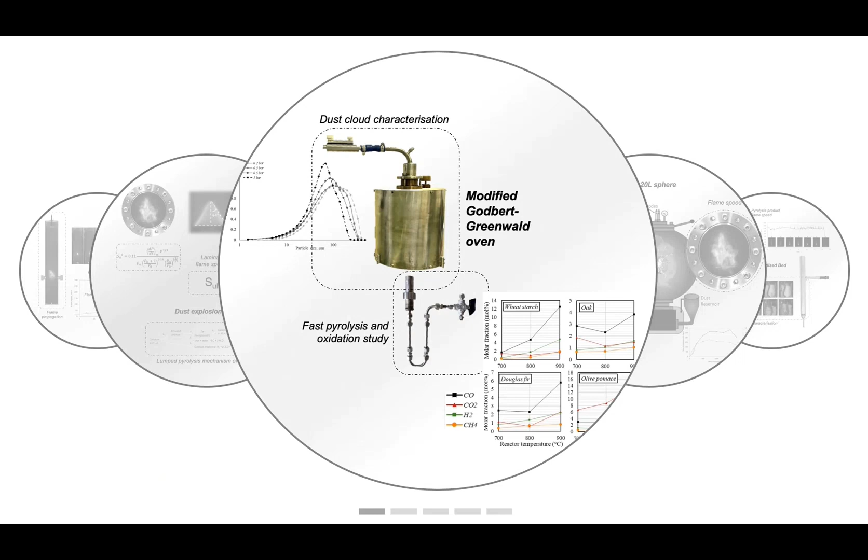We used the 20-liter sphere to perform some hybrid tests and explosion severity tests as well. The flame propagation results in the 20-liter sphere were compared to two other experimental setups.

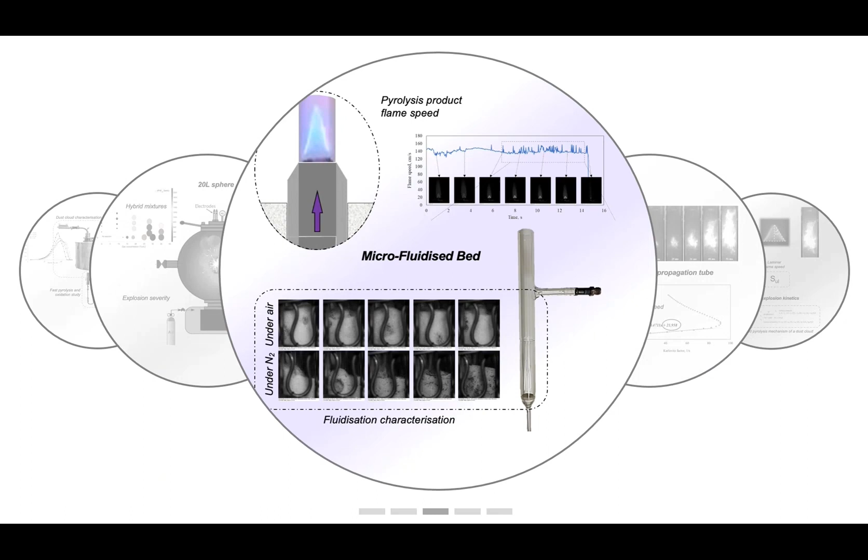The micro-fluidised bed was characterized in terms of fluidization, and the flame speed of the pyrolysis gas products was determined. In the flame propagation tube, the unstretched flame speed was determined and compared to the other two setups.

We can conclude in general that the PSD, the particle size distribution of a powder, strongly influences the behavior of the dust cloud and has a primary role in determining the rate limiting step of the global phenomenon.

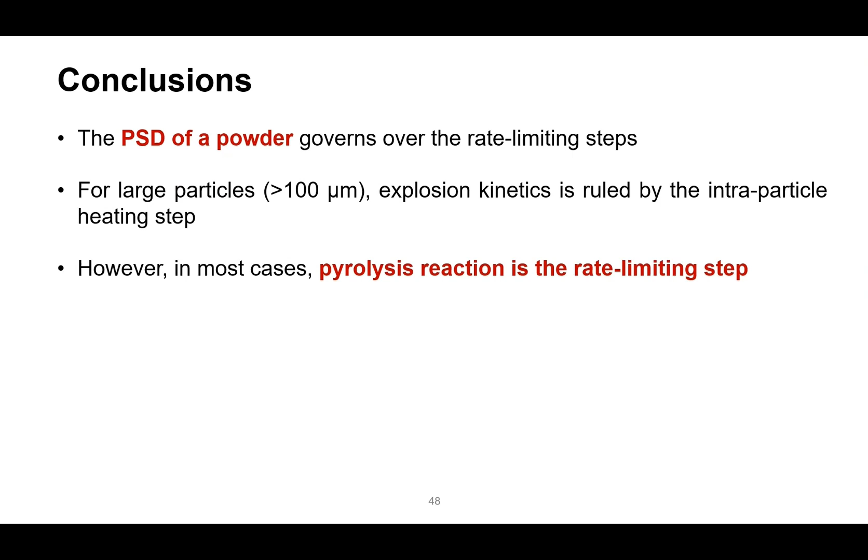For larger particles, we can associate the rate limiting step with the particle heating step, while in most cases for finer particles, the pyrolysis step is the rate limiting one.

We were able to stress the influence of the gas products composition on the global phenomenon, especially the H2 fraction composition.

The pyrolysis mechanism was proposed and validated, and the oxidative pyrolysis and homogeneous combustion of the products were decoupled, and flame speed was used to compare different results.

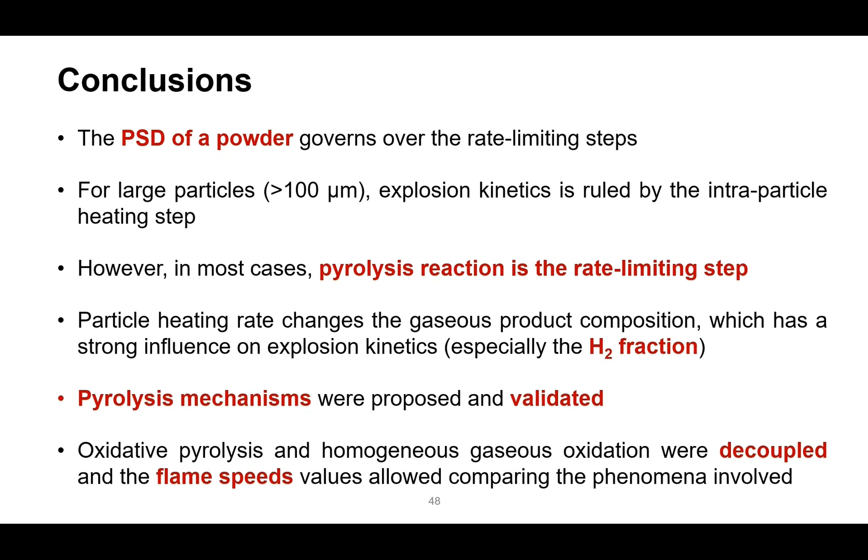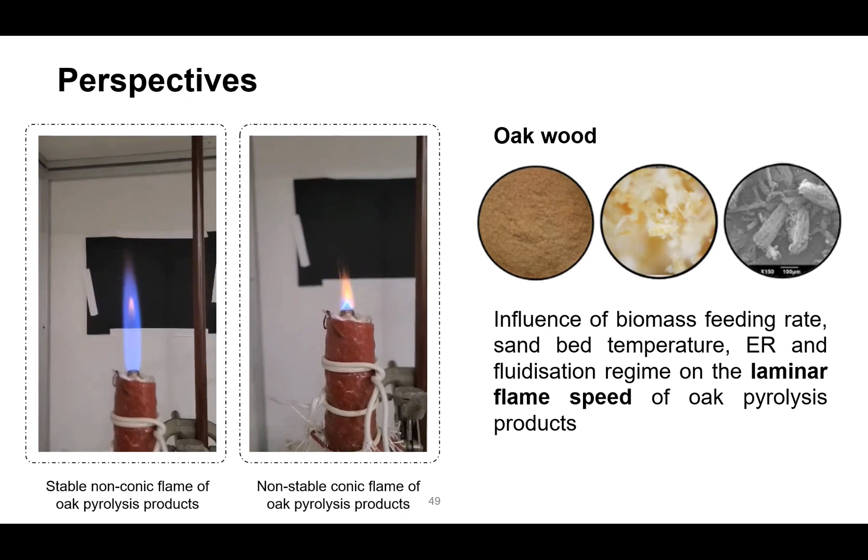In terms of perspective for the future, we were able to create a flame from oak wood, substituting the cellulose with oak wood, but we were not able to stabilize the flame high enough to perform high-speed video analysis. We would also like to couple our results in terms of kinetic mechanisms with CFD already present in the literature, to pass from a pure CFD to a reactive CFD, and perhaps elaborate an organic dust explosion predictive model to determine the explosion severity parameters and the flame speed values.

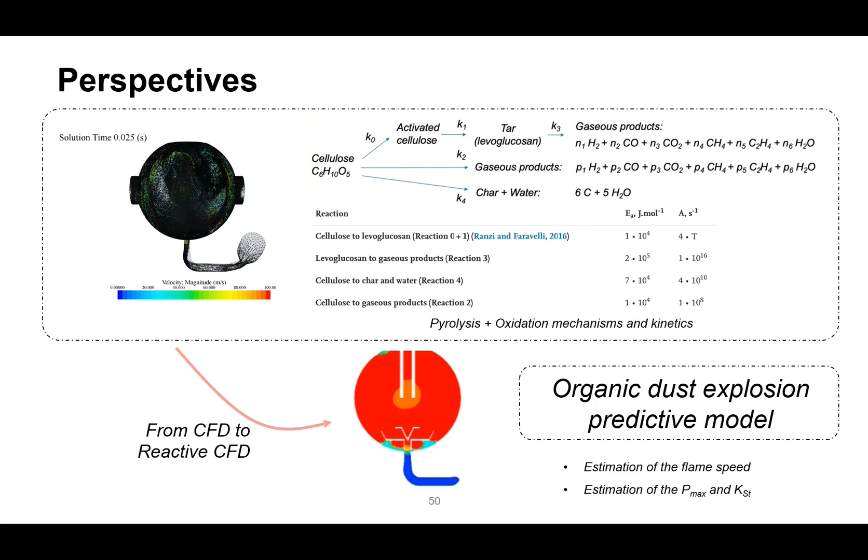I would like to thank everyone that stepped in my path. These three years were very difficult, but I'm very happy with the results, and very happy to be in the presence of some amazing people. I would like to thank the jury, the members of the jury for being here, and my supervisor for guiding me through this difficult and complex path.